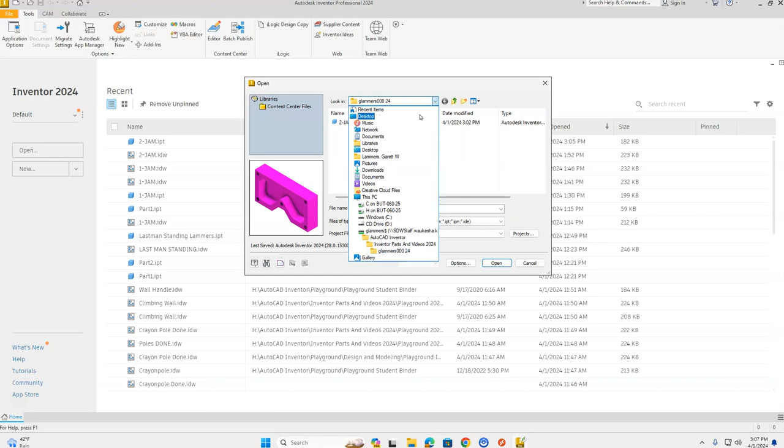To begin, we have Inventor open and need to find our part on the H drive. Go up to the orange file menu in the top left corner and select Open. When the Open menu comes up, it should automatically connect to your H drive under first initial, last name, 000. If it does not, click the pull-down menu and you should be able to select it; it should be the last one at the bottom of the list. In there you should find your 2Jam part. Click to select it and select Open.

Now that we have our part open, let's go up above our ribbon bar. Remember the tabs up here—we want to change to our CAM tab, C-A-M. The first thing we need to do in the CAM tab is go to the Jobs section in our ribbon bar and click the Setup folder.

Once we click Setup, there are a few things we're going to change in our model browser on the left hand side. You can see there are 3 tabs going across the top. Remember, we work through each tab from left to right and top to bottom.

The first thing we want to do is change our origin. You can see it comes up defaulted to the middle. We're going to change our origin in the work coordinate system from stock box point to model origin, and that puts it in the lower left corner.

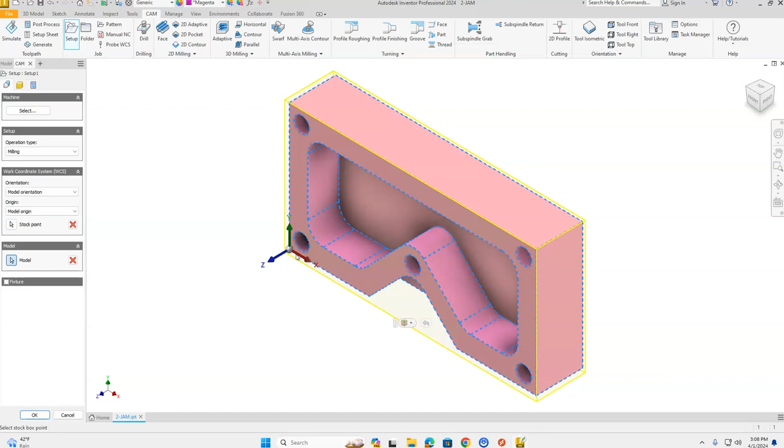Then we go to our second tab. When it comes up, we'll leave it at relative size box. However, where it says stock offset mode, we're going to change this to no additional stock.

With no additional stock set, let's go to our third tab, the Post Process tab. In here, we're going to change our file name by highlighting 1001 and changing it to 2Jam. Then at the bottom of the window, we click OK.

So our part is all set up. The next thing we need to do is create our drill tool path to drill these 5 holes here. Let's go up to the drilling section and click on the drill feature.

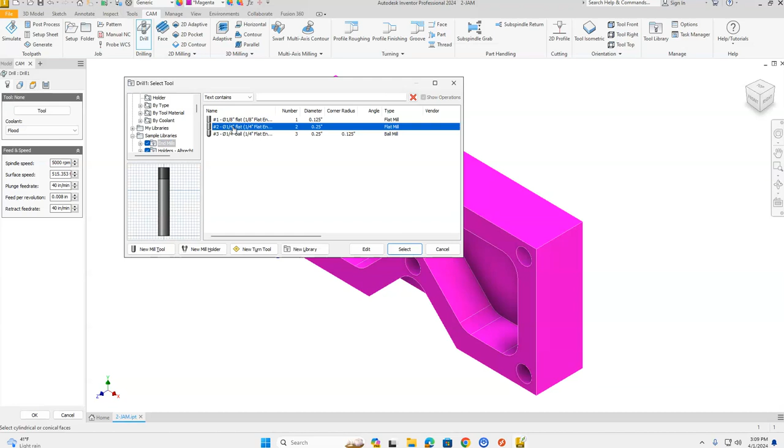Once our drill section opens up in the browser bar on the left, we have 4 tabs across the top. The first tab is to select our tool, so let's click the tool button. We go into this skinny window on the left, scroll down a bit to sample libraries, and underneath that is end mills. We're going to choose tool number 2, 1/4 inch flat, and click select. That's what we'll use for our drill bit to drill these 5 holes.

Next, we go to our second tab where we select our geometry. Here, we're going to come around and select the holes. You can put them into any order you want to click them, because right now we have optimized order, so we're allowing the computer to determine the fastest way to cut these holes.

Next, we're going to establish our heights. Go to our third tab. For clearance height, retract height, and feed height—the top 3, only the top 3—we're going to change to stock top and 0.2. So clearance height: stock top 0.2, retract height: stock top 0.2, feed height: stock top 0.2.

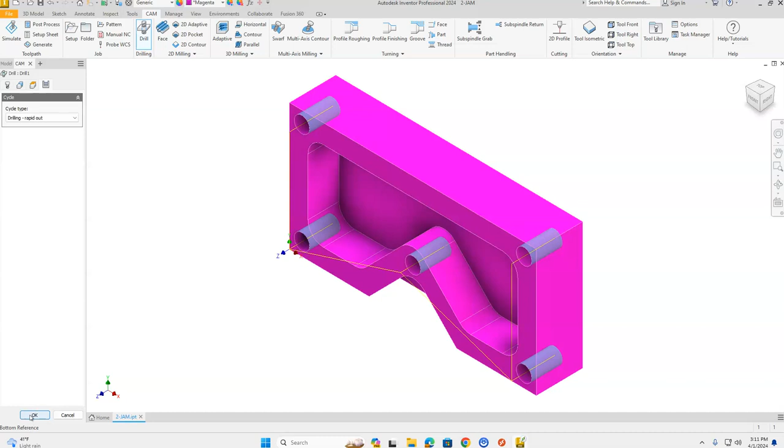Let's go to our last tab. For our cycle here, we're going to drill and rapid out. So what's going to happen is it will drill that hole, rapid retract out of the part, rapid over to the next hole, drill that hole, rapid retract out, and complete going around. That's what we want. Let's click OK in the menu in the bottom left corner.

So our drilling is all taken care of. Next, let's move on to our pocketing, to pocket this hole here and this one here. We're going to click our 2D pocket from the 2D milling section of the ribbon bar. Select 2D pocket.

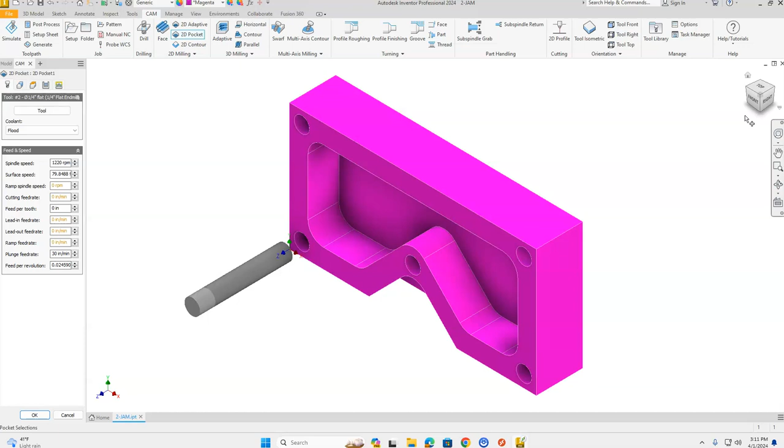And before I choose anything, what I want to do first is I'm going to rotate this up just a little bit. I can do that by using my free orbit tool over here in our navigation pane, or I could click on this bottom corner between the front and the right side views. Okay, and that shows me that I can see this triangle area and this area right here that needs to get cut.

Okay, so next, our ribbon bar, our model browser over here on the left hand side, we have the tabs we're going to work across from left to right, and each tab we're going to take a look at from top to bottom. The first tab, we want to select our tool. In a small menu over on the left hand side, we're going to come down, we're going to choose End Mills, and we're going to select tool number 2, 1/4 inch flat end mill. Click select.

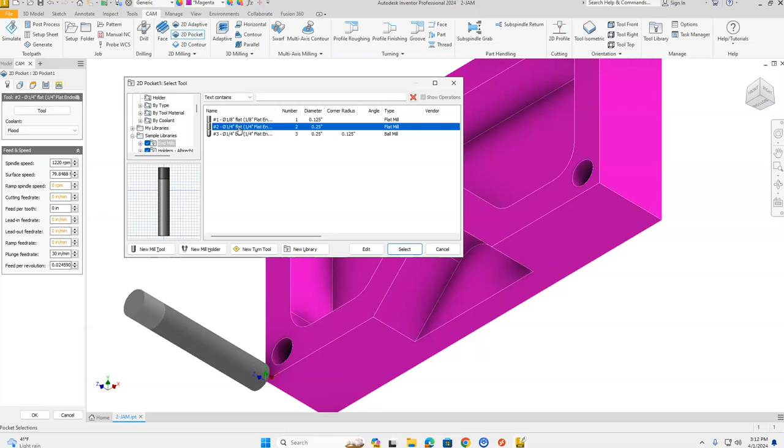We're going to go next and select our geometry in the geometry tab, and I'm going to click this bottom surface here. Make sure you get that whole surface to highlight red, and the back side where this sort of face mask looking shape is. Make sure you're selecting that surface. Okay, after you select those two surfaces, we can go on.

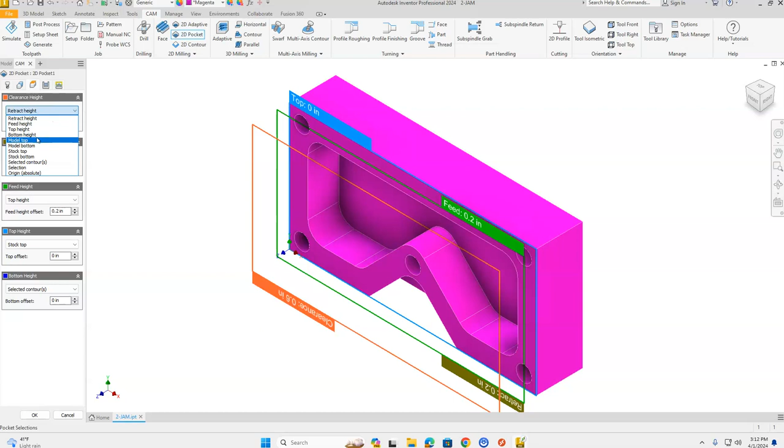Then let's go to establish our heights. Click the third tab over, and once again here we want to change clearance height, retract height, and feed height to stock top and 0.2. Retract height, stock top, 0.2. Feed height, stock top, and 0.2.

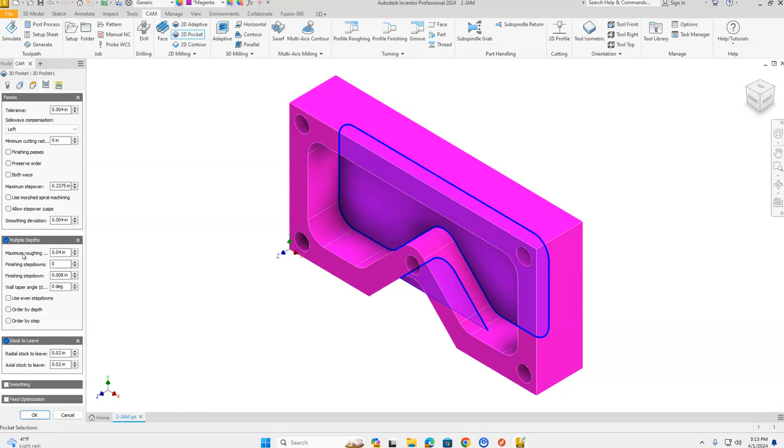Okay, once those are done, let's go over to our parameter number of passes. Since this is a 1/2 inch deep, we're going to have to take this in multiple passes. So let's go to multiple depths, click on that to activate it, and we're going to change our maximum roughing step down to 0.25. And where it says stock to leave, we're going to uncheck stock to leave because we don't want it to come short to our dimensions.

Let's go to our last tab, which is our linking parameters tab. Click on linking, and you can see here our safe distance, we're at red. We're going to highlight that and change it to 0.2. And then in the leads and transitions, we're going to uncheck lead in. We're going to uncheck lead out. In the ramp section, we're going to change our ramp type from helix to plunge.

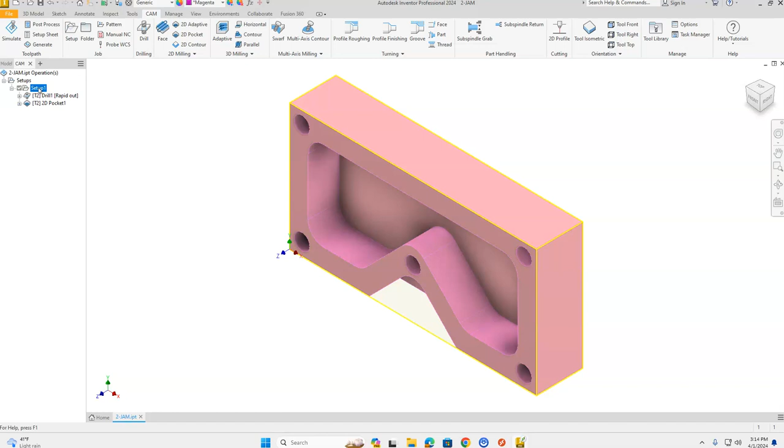And we're done through all the tabs, and down to the bottom, we're going to click on our OK button in the bottom left hand corner. It's going to process that. We're going to go up to the top in our model browser here, click Setup 1, and it's going to go through all of them. That highlights all tool operations. Let's click Simulate. Make sure the check mark in front of stock is turned on, and then click play.

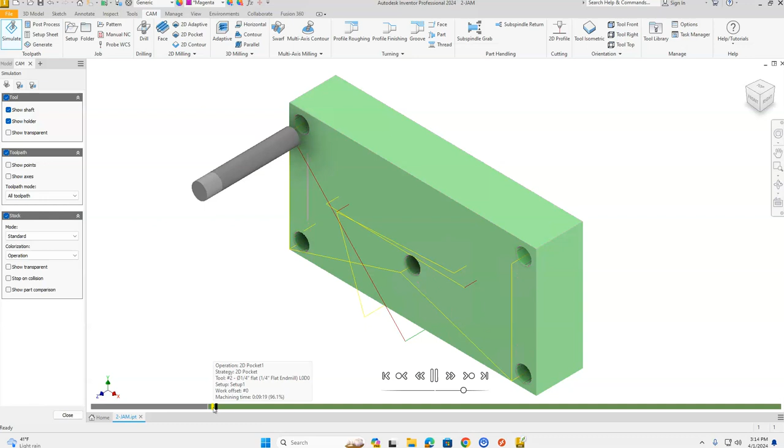It's going to go through and cycle through the drilling operation first. Then it's going to go through the milling operation, where it's going to pocket that next section out. Okay, remember that's taken in 2 different passes there. Once it finishes, and we don't have any collisions, no red arrows or red sections down here in the bottom, then we can click close in this menu on the left, and we're going to post-process it. Right up here is post-process.

Click on that. We're going to make sure that we're going to our output folder. So we're going to click on the button here, and you're going to choose your H drive, first initial last name 000. It can also be selected over here on the left hand side of your screen. Click select folder. Our part name carries through. It says 2Jam. Click post button right here. Making sure we're calling it the right thing, 2Jam. Click save.

Wait for it to finish processing, and then we get our HSM editor up here. This is where it shows all of our X, Y, and Z coordinates and our M and G codes that control the machine on the CNC mill. Let's X out of this up here in the top right corner, and then let's go to the orange file and down to save. We already have this part created. We're not changing anything for a file name, so we're just going to click save to update the changes for the CAM operations. Once it goes through and cycles the change, you are finished with this part.

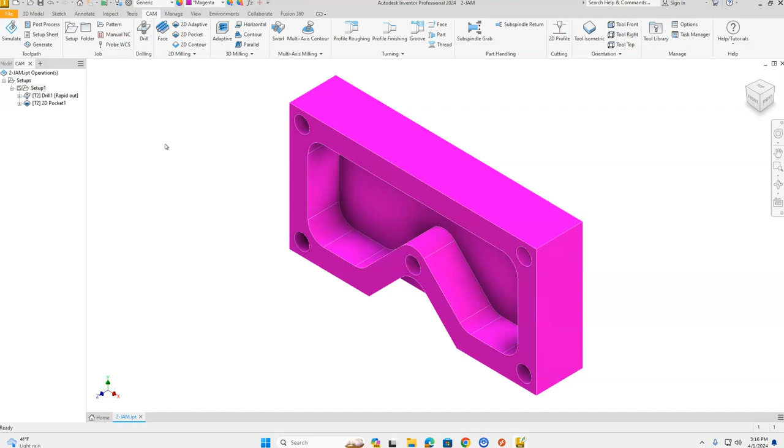Make sure you tell your teacher you're ready to go and cut your part on the CNC mill. Congratulations on finishing the 2Jam.